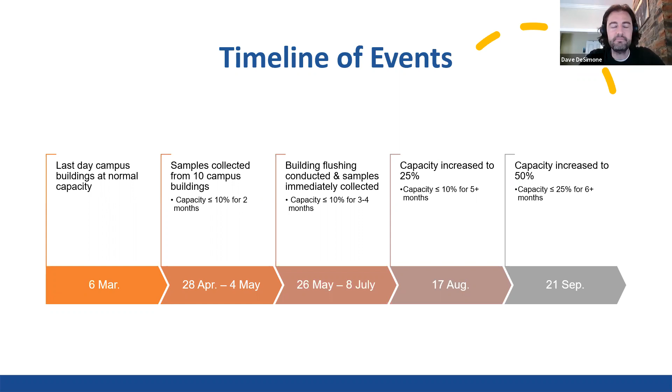You can see that back about a year ago is when we were taking our samples, and during the summer we were taking follow-up samples as well, and then into the fall is when we were doing the analysis. So our goal here was to look at this sample collection in general. We wanted to see our first draw. First draw is when you immediately turn on the tap, what is coming out. That is considered first draw sampling. And then flushing would be about 30 seconds afterward, standard flushing.

But we saw that in general, that wasn't enough. We had to conduct flushing all the way back from the fire hydrant, ensure fresh water is coming into the fire hydrant, then go into the basement, find the point of entry into the building, flush at the point of entry, and then continue to flush at each sequential fixture all the way down the plumbing. A common practice when flushing buildings is just to either flush all the toilets or flush arbitrarily throughout the building or flush all at once.

We found, and prior research has shown, proper flushing requires sequential flushing from the point of entry in the building, one at a time, to target each cold water fixture, whether it be a sink or a drinking fountain, all the way through the building, going from the first floor all the way up to the fourth floor. And so that's how we conducted our sampling and our flushing, I should say.

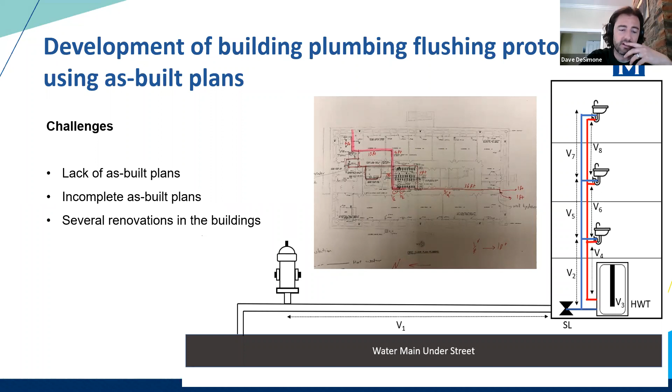So like I said, we had to follow the as-built plans, and so we were looking at the as-built plans to see where the plumbing goes through the building. Unfortunately, we tested 10 buildings at University of Memphis, seven academic buildings, three athletic buildings, and not all of them had as-built plans. Some of the as-built plans were out of date. There had been many renovations in the building, whether it be minor or major renovations, and all that affects transport of water through the building and hydraulic volumes overall.

So once we were able to procure the as-built plans to the best of our ability, and from the as-built plans determine the potential plumbing material that was used, and also the hydraulic volumes based on the length and diameter of the piping, we're able to come up with an idea of the flushing times that would be necessary given specific volumetric flow rates at each fixture. We could determine an approximate flushing time at each fixture, again sequentially through the building. But again, before we could do the flushing, we had to conduct the sampling to determine the stagnation, and we have some photos of that in a moment. And you can see that flushing was definitely necessary.

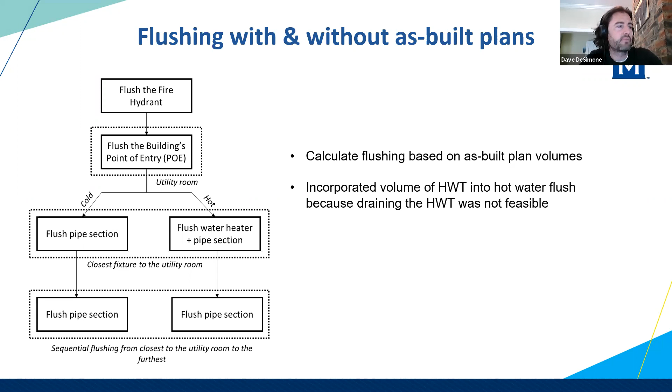So this is just kind of a process diagram of how we flushed, starting at the fire hydrant, like I said, then at the point of entry, then at each individual fixture, whether it be cold or hot. Again, those follow two different lines. We did not drain the hot water tank from a logistics standpoint. Draining the hot water tank would have released a lot of particulate matter into the hot water lines. We just flushed the hot water tank by calculating the hydraulic volume in the hot water tank and ensuring plenty of turnovers. And so this is our general procedure that we followed here.

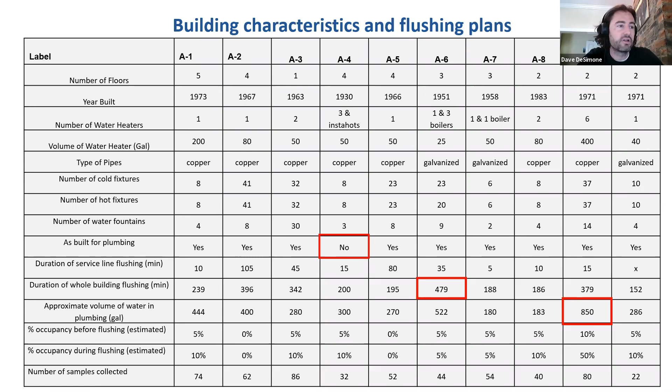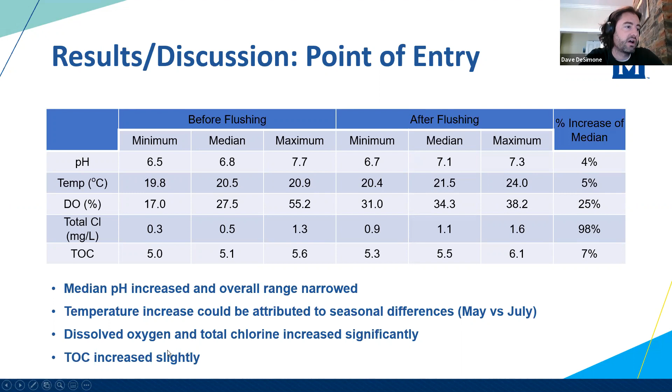Temperature increase could be attributed to seasonal differences. We did the before flushing sampling in May, and the after flushing sampling in July. Dissolved oxygen and total chlorine increased significantly, which was great. It shows it's fresher water, and TOC increased slightly.

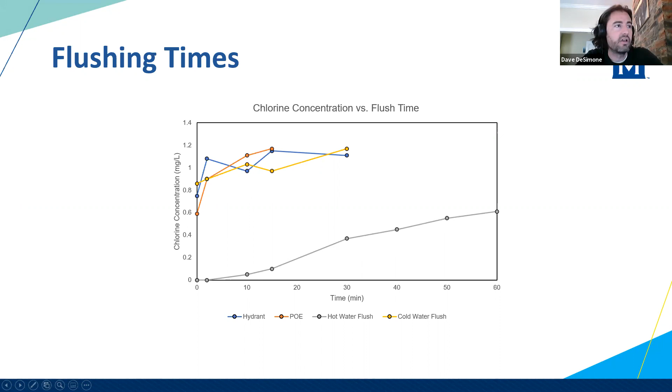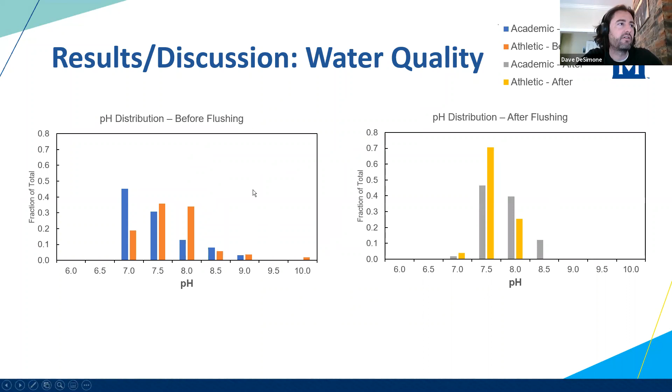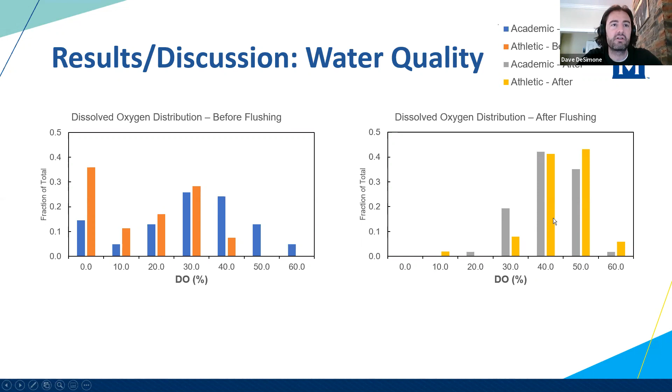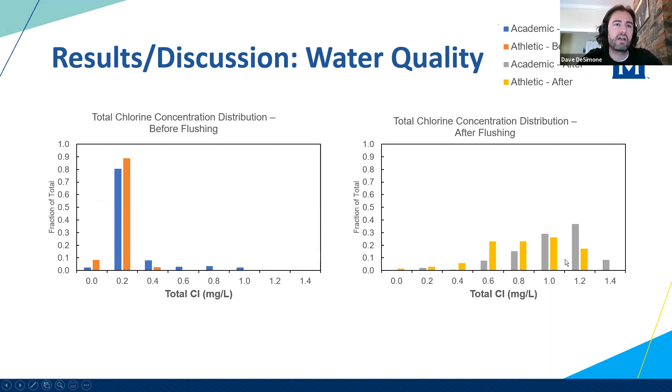But the dissolved oxygen after flushing significantly increased for both academic and athletic buildings. Same was true for chlorine; usually those two go hand in hand, chlorine and dissolved oxygen. Low chlorine concentrations before, much higher values in the distribution after. Just for the sake of time, I'm continuing. I want to get to the results of what we were targeting specifically, which was metal concentrations.

Again, we measured the pH, the chlorine, the dissolved oxygen, all those to ideally have some indicators going forward to know how those correlate with what we're truly interested in, which is the metal concentrations. So I bring you to the metal concentrations.

So you can see here a few box plots for copper concentration, zinc concentration, and lead concentration. On the left of each plot is the before flushing. On the right of each plot is the after flushing. So you can see for all three, copper, zinc, and lead, the median value, which is indicated by this middle line here. The lowest value of the box is the 25% quartile. The line between the orange and the gray is the 50%, and the top of the gray is the 75% quartile.

The outliers, for sake of visibility, are not depicted on these box plots because the outliers were very, very extreme. You can see our ranges here in milligrams per liter for these heavy metals are all less than 1 milligram per liter, but there were outliers up around 20 milligrams per liter. So if I had included all the outliers, you wouldn't even be able to see the majority of the data. So they're truncated, but they are noteworthy, and we'll get to those in a moment.

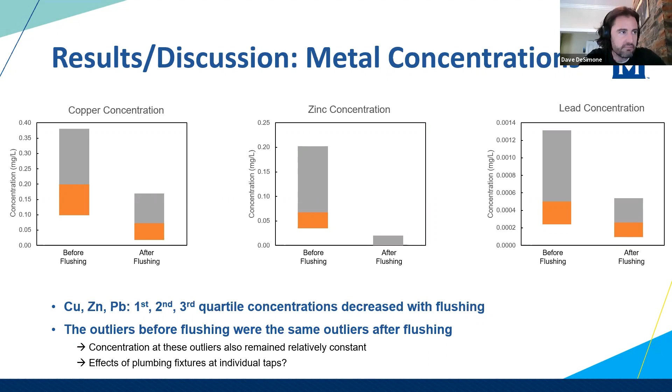So you'll notice on that slide I left out iron, and that's for one specific reason. The iron concentration, again, we're talking median values, and median values are depicted by the middle line here between the orange and the gray, actually increased from before flushing to after flushing. So from a statistical analysis standpoint, as you can see on the slide, we ran the Wilcoxon signed rank tests. Copper decreased, zinc decreased, lead decreased, and we saw that in the previous slide.

The iron concentration from a statistical standpoint actually remained constant, and that's taking into account the 75th percentile here that decreased, the median value that increased slightly, and the 25th percentile that increased slightly. So overall, when taking all these as a signed rank test, flushing had no effect on the iron. Looking visually, though, on just the median concentration, you can see that it increased. So there's a conflicting thought here.

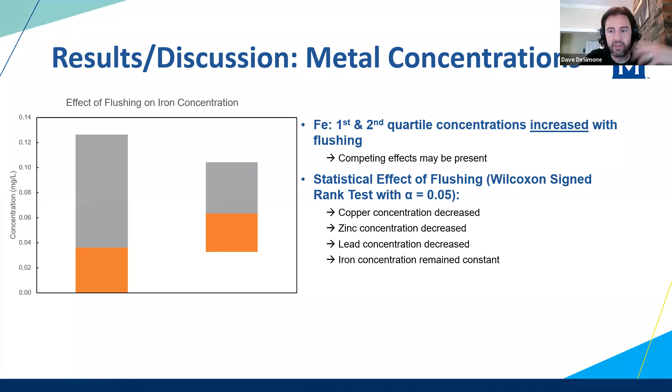If your goal is to decrease iron concentration because you have high iron from either the galvanized pipes or any other source, flushing may not do the trick. So again, flushing, even by the EPA, has been promoted and is encouraged, and it still is. But what we had seen was it's not an end all be all for all fixtures and all metals. It definitely has to be taken under consideration.

So overall observations: stagnation definitely was influenced by both duration and capacity. So low capacity buildings had a higher stagnation, which is not rocket science. Fewer people were in the buildings, so fewer people were using the fixtures, so therefore the water stagnated. That stagnation, specifically over a long period of time, led to heavy metal absorption into the water. Flushing at hydrants was necessary to ensure fresh water entering the building.

pH exhibited a slight increase, and jury's still out on why that was, but we assume it was because of the higher iron. Metals, except iron, exhibited significant concentration decrease. Water quality has returned to pre-flushing values. So that's the other thing to keep in mind.

This was quite an undertaking to do for 10 buildings, again, doing it in a sequential, methodical manner from the point of entry through every single fixture, all the way to the highest floor of the building. Took a lot of time because we had to do it one at a time. We flushed each fixture individually, and even doing it in the most methodical manner, according to as-built plans, we returned to pre-flushing values on follow-up testing within about a week or 2 weeks, depending on building capacity. So it's something to keep in mind.

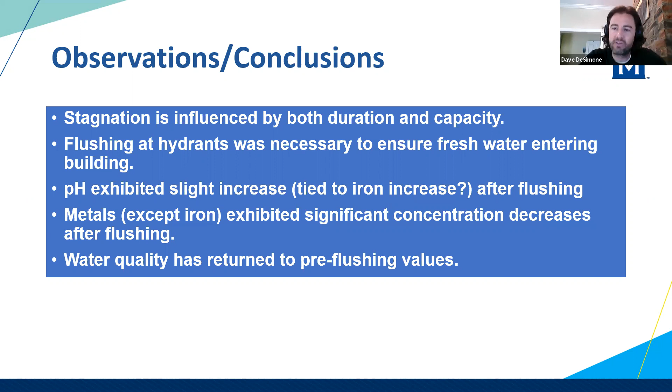So if the buildings are going to be reopened, and again, this is more prevalent now as we're getting back into on-site instruction, and also other facilities are getting up to higher capacity. Just in Tennessee, over the last couple of days, we're back at almost 100% capacity. The thought is conduct the flushing right before the building reopens, otherwise the point is lost relatively quickly.

So here's some of the photos, the range of rainbow of samples that we've taken from buildings, whether it be on site at the University of Memphis or other schools within Shelby County. So obviously there's a range of clarity, which in the business we call turbidity, in essence. And this is a range of metals that we saw, everything from, like I said previously, lead, copper, and iron, to other metals that we even tested for, zinc being one, tin being another.

And based on the building infrastructure, the age of the building, and the capacity, we saw quite a range. But because of all this, we were able to, and we're in the process of publishing this, develop standardized flushing protocols based on capacity, as-built plans, hydraulic volumes, piping, meaning the metals, whether it be galvanized iron or copper piping, and the size of the building overall, which is what we contributed from a practical standpoint to Dr. Salihi's theoretical research previously.

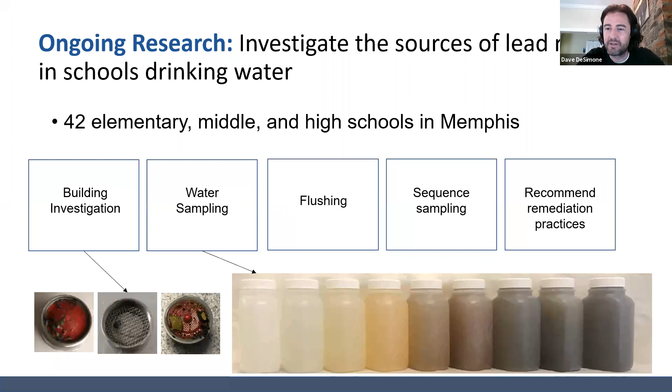So this was kind of a change of plans from what I was brought on originally, but given the situation with COVID-19, it was quite a troubleshooting experience, to make lemonade out of lemons, for lack of a better term.